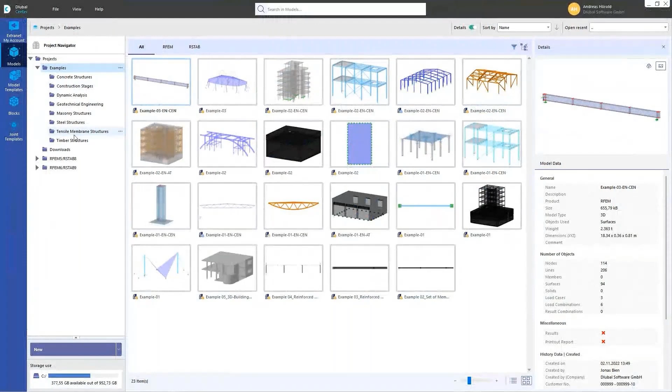info@dlubal.com. Okay, then I open RFEM, and the first question is, I add new objects to the design. Do all results have to be recalculated? The answer is no. It's not necessary to recalculate all. How to do that? I will show that on that simple example. That example, you can find it in the Dlubal Center under examples, then steel structures, and that's the example. I prepared that. I selected also the steel design.

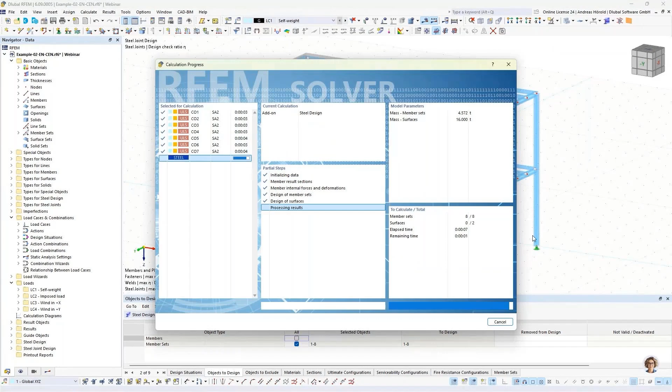Okay, so let's do a steel design. And I select only the member sets. The member sets are all columns. Let's calculate all. I have to mention that I don't edit imperfections. I don't edit buckling lengths and so on. That's why we don't do any stability design here. It's only an example. So I switch to the wireframe model. And you can see we see all the results for the member sets.

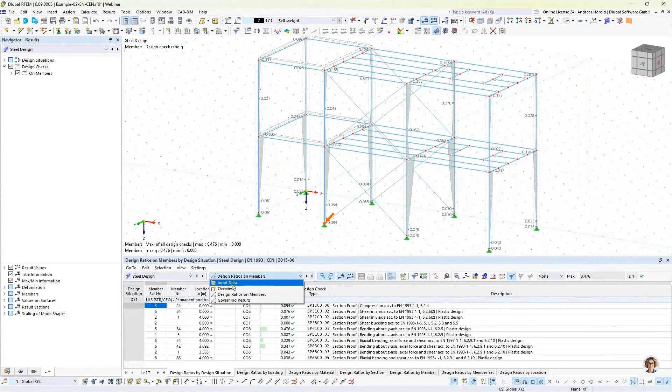So, when we want to design also the members, I select the members, then all results are deleted. So now I show you the other way. I calculate the member sets again. And if you don't want to delete the existing results, go to the navigator data, left at the bottom, and then right click to steel design and press settings. The other way is to go to the table steel design, input data, and then you can press that button.

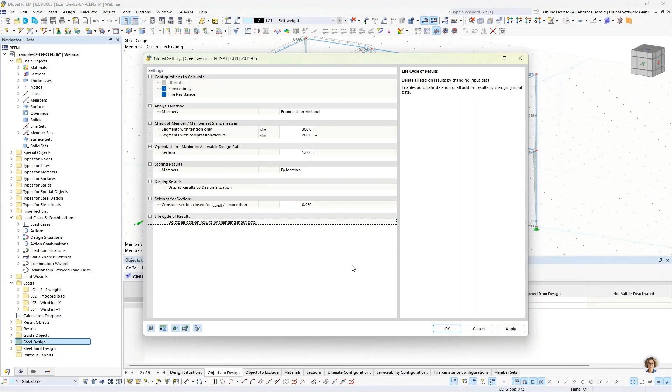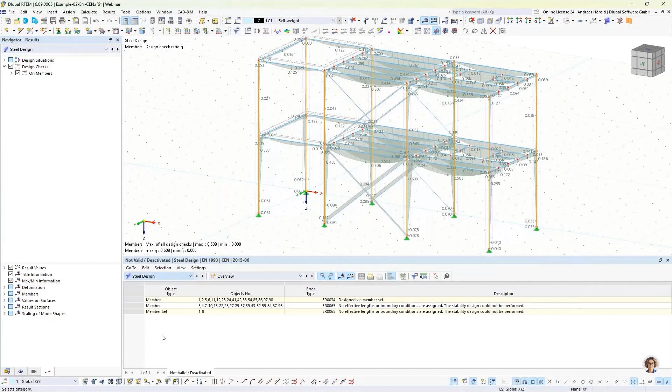That's a different way. And then you can deselect that button, delete all add-on results by changing input data. And if you uncheck that, the results aren't deleted. Okay. So now we select also the members. The results aren't deleted, and I can recalculate all. So now we have results for all. It shouldn't be necessary for that simple calculation, but if you have, for example, more complex models or more load combinations and so on, then you can do that, or you have activated the add-on steel design.

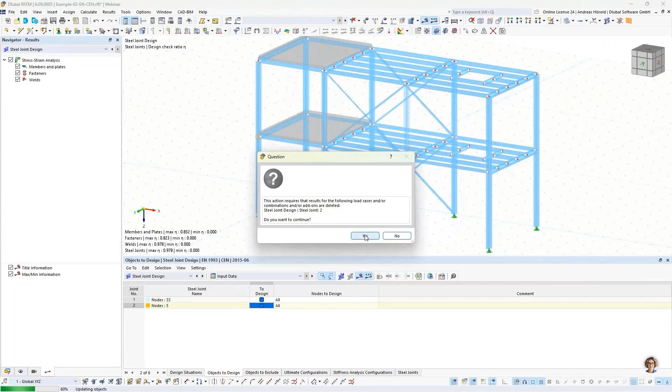In this example, only one of two nodes is designed. Yeah, only this node. I can show that. So this connection or the joint is already calculated, but not this one. And if I deselect that also, then I can press that button for designing the node 5, and the results aren't deleted. It's only an error, not calculated yet, but the results of this node, node 33, aren't deleted.

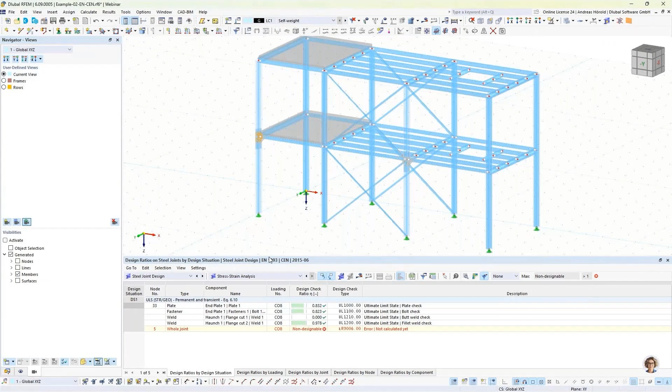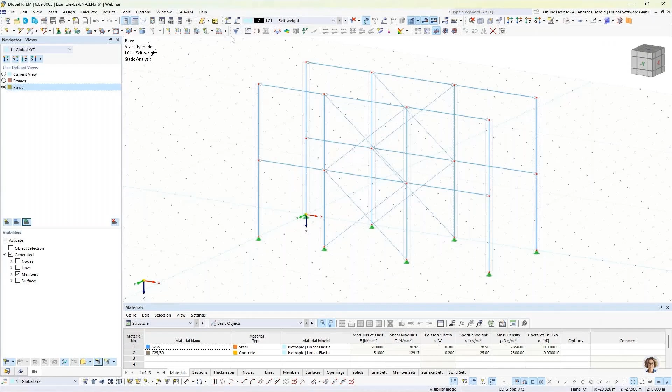Okay, then we turn to the next question. I want to edit a multi-print afterwards. How do I do that? I prepared this example. At first, I don't show the results. As I said, I prepared user-defined views for the frames and rows. And I want to print the internal forces, for example, for the rows or the frames. Let me show that. For example, we show the member internal forces for N or My.

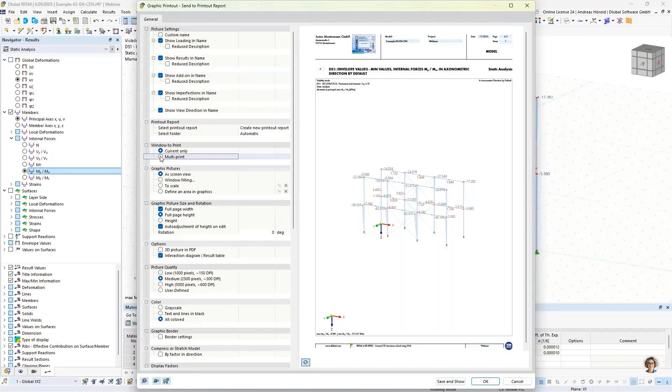And we would like to do a multi-print. So let's do that. Print graphics to printout report. Then I select multi-print and window filling. So then we have to select what we want in the multi-print. No views, no loads, but results. For the frames and the rows, the user-defined views, then members, internal forces, for example, N, VZ, and MY.

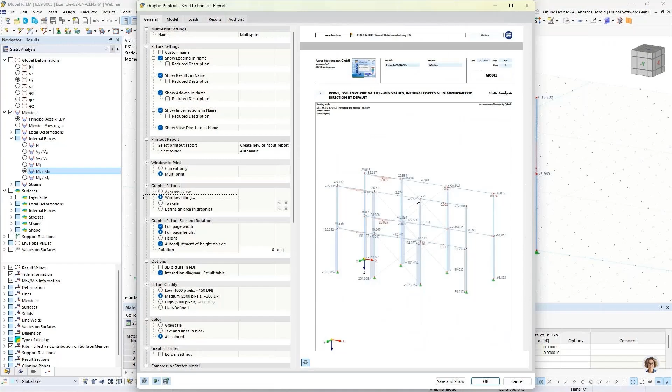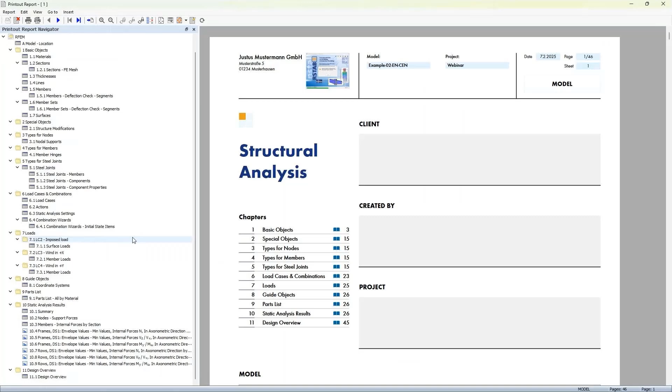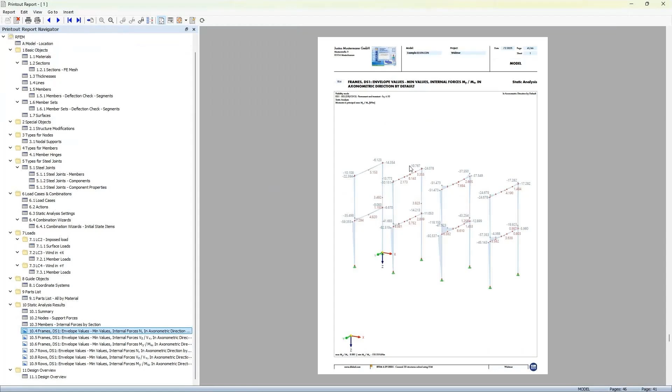So now we can see the different graphics. I can change the view, fit page. So those are the 6 graphics, and we want to edit these multi-print.

So how to do that? That button, edit multi-print. I select it.

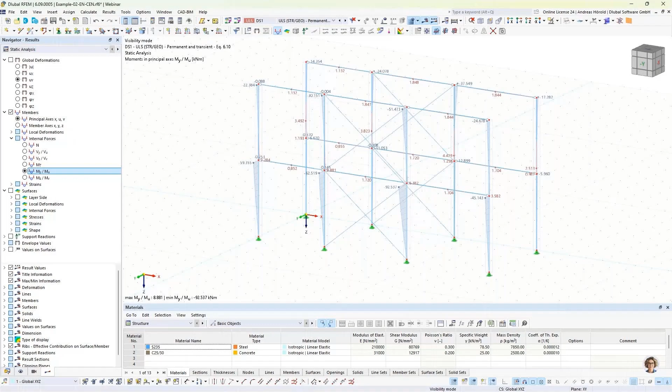So, and now we can change the settings. For example, results, we want to add the other internal forces. So now we have got 12 images.

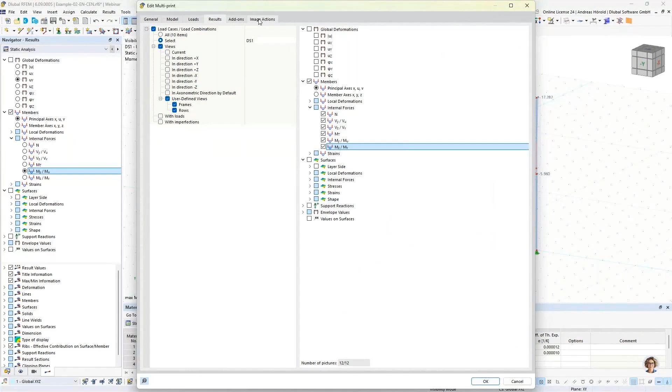So, and we can go to or turn to image actions. And we can increase the window. We can say update or no action, add for the new graphics, or what you want.

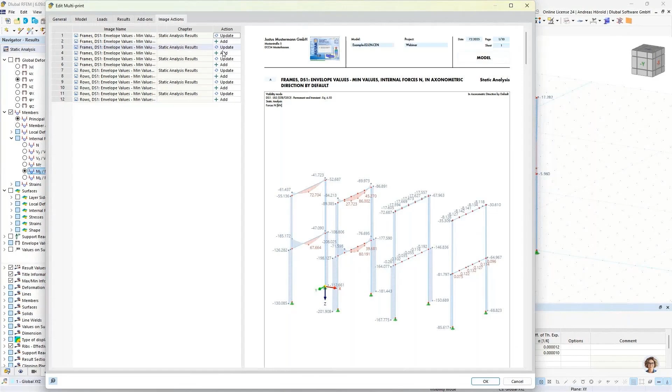You can also change the graphic, for example, the color grayscale, then all images should be in gray. Update add, we leave that. Press OK.

So, yeah, the graphics are updated now, all in gray, and we have got all the 12 graphics. Okay, that should be all to that question.

The next question is, why do I get a different section moduli in RSECTION than in SHAPE-THIN? Let's turn back to the PowerPoint.

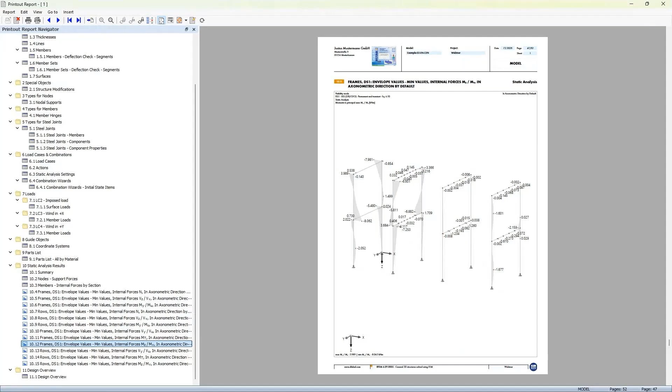And in RSECTION, there's a more complex or more detailed formula. It's more exact, and it's an improvement in RSECTION. And you will get different results.

And what is important in shape thin, with the section moduli calculated in this way, it's not possible to directly calculate the maximum and minimum normal stress from the bending moments for asymmetric cross sections. For symmetric cross sections, you will get the same results in both.

And in RSECTION, the section moduli are determined in such a way that they allow for the direct calculation of the extreme normal stresses from the bending moments. And that's the difference. That's a short overview.

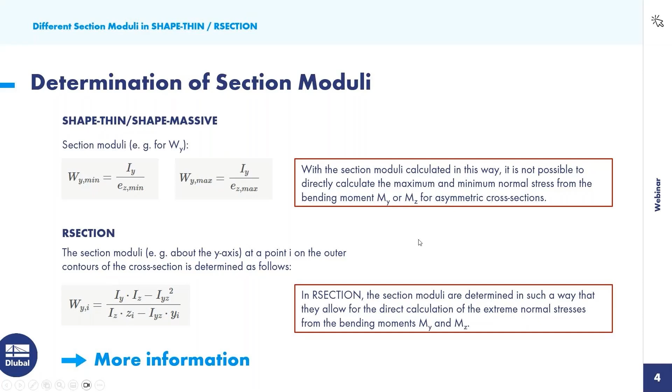We start with the moments of inertia. That's the same: 515.9, and Iz is 94.46 for both. But the section moduli is different.

So, for example, WY max 75, and where is it? Here, 37.18. The section moduli are different, and the reason is, as I described it in the PowerPoint.

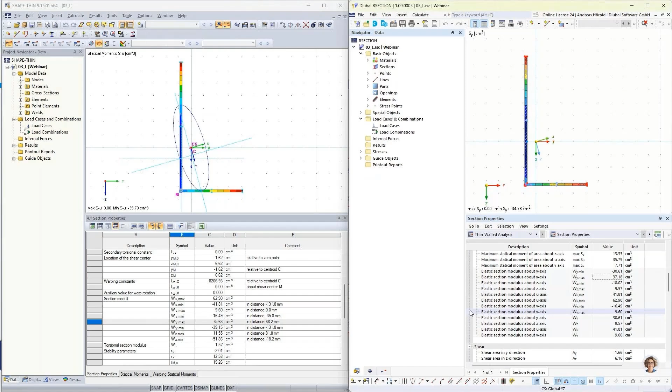So the next question is, can the longitudinal reinforcement of members be determined automatically? So I've created a model for you. This is a reinforced concrete building with members building a frame, having 3 frames in a row and 2 stories.

And load transfer surfaces, which will hand over the imposed load and the snow loads and the wind loads on our building. So we already have static analysis results.

And what we now want to show is how you can define reinforcements and let them be calculated automatically for you. So we show it in two member representatives. So number 2 are the outside members and representative number 3 are the inside members.

And if you double click on the member representative, you can assign longitudinal reinforcement for all the members behind it. So usually you can define the number of bars and the diameter, but the program can also automatically determine this for you.

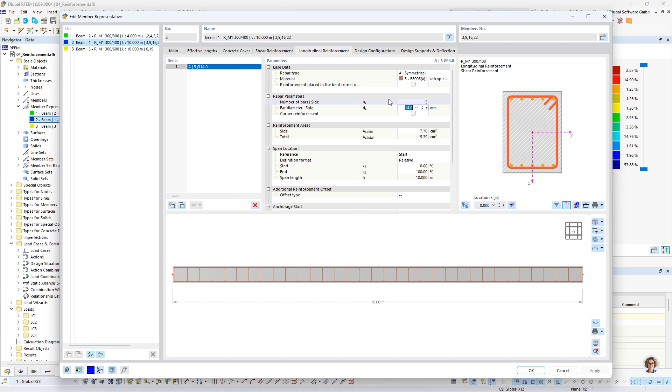So not both simultaneously, but either this number of bars or the diameters. For the representative number 2, we want to automatically design the diameter. So we want to put inside 5 bars in the range of 10 up to 20 millimeters of size. So whenever it reaches the maximum, it stops, of course, from inputting more bars or thicker diameter.

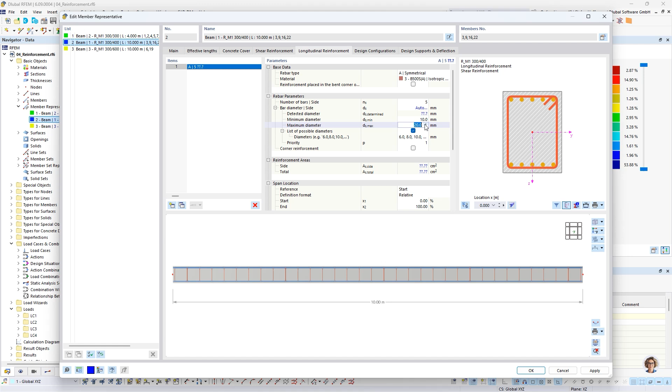So you should see in the results that then the design is not fulfilled. So you can later on adjust, of course, these boundaries in order to let the program fully determine the amount of bars. So you see what you can enter in here.

And for the representative number 3, we want to adjust the numbers. So we hit auto, and then we can also determine with a diameter of 20 millimeters in our example a maximum amount. I know that 4 are not sufficient, so we will try to put in 4 and see what the program will offer us.

We go into the concrete design where we now only want to get results of both representatives. So now we hit calculate. Due to the fact that we already have static analysis results, it quickly jumps into the concrete design, now doing the workflow for you. It's calculating the amount and the diameters depending on what ranges we input.

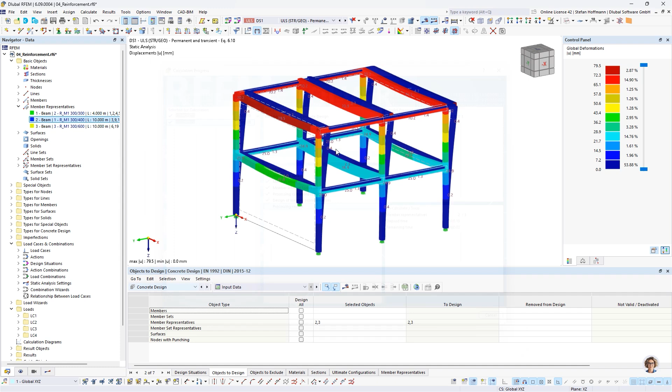Once we receive results, we can see that one check is not fulfilled. This may be an information that it's not sufficient reinforcement put inside. We can quickly determine, for example, the bottom reinforcement for our representatives is like 17 in the middle. What the program provided us is, if you only check for bottom, 12.57 in the middle. So you may be wondering why it's not enough.

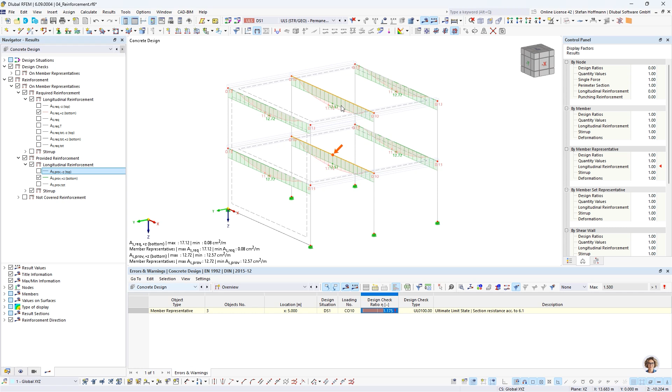You can also check this in the not covered reinforcement if you want to see the gap. We can now see that there is only a lack here. If you remember, going into representative number 3, I told you we want to achieve this result by putting a maximum of 4 diameter 20 inside, which will give us 12.57. So this is, of course, not enough.

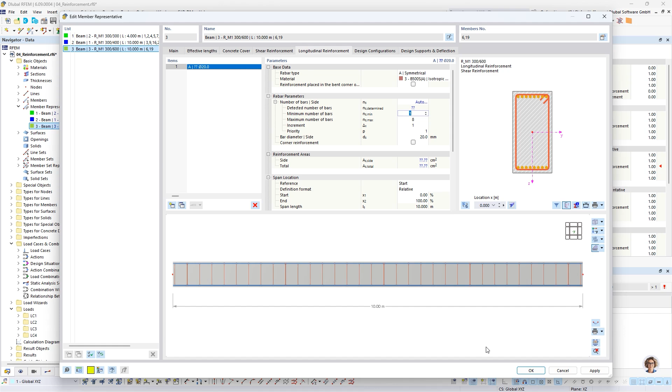So in order to let the program run at full capacity, we now allow a maximum of 8 bars in this member representative. There is no boundary for the program that it has to stop. It can now determine and fulfill the design process.

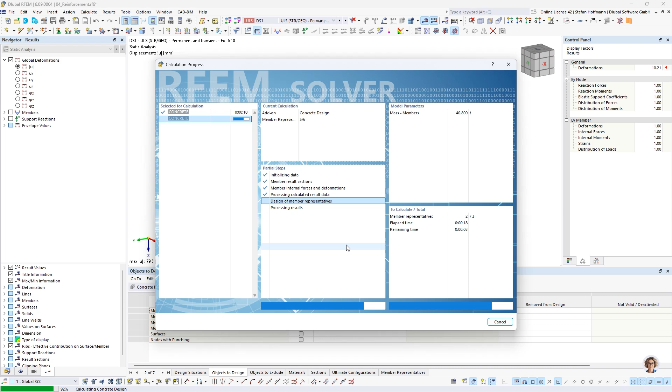Whenever you get the results, we see that in the table there is no limit anymore. There is of course a maximum, but this is only due to construction reasons. If you now compare once again, it does not change. We need 1712, and we provide now 1885 in this area. This means there is no not-covered reinforcement for our model. This shows how you can quickly and automatically let the program determine the required reinforcement for your members.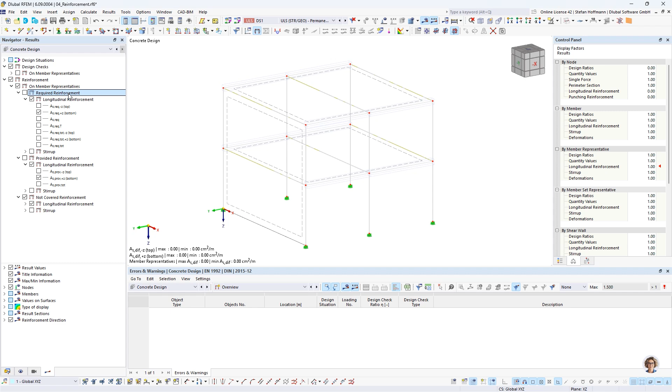We will go to the next model, our block foundation. So the question is, can I design a block foundation in RFEM 6? And yes, it's possible.

Quickly about the model, we have just a single column which is fixed at the bottom with some loads on it. In order to define a block foundation, you have to assign it in a nodal support. You simply hit the check that it's a foundation, and then there's a next topic where you can choose what foundation you would like to choose.

It's object oriented, as RFEM 6 offers you to define one object of a block foundation for multiple columns. You just simply need to assign this object, and you do not need to type in multiple inputs just for multiple similar objects.

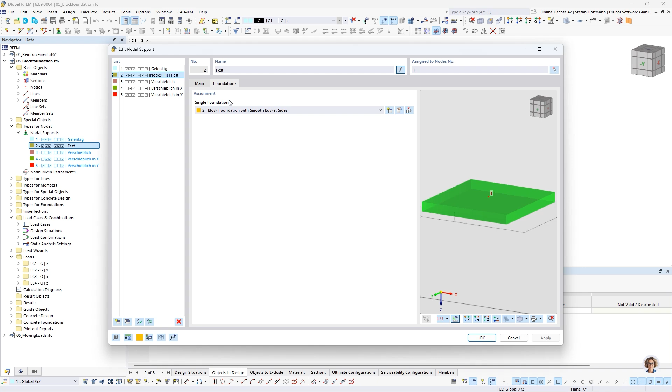Once you define this, it is also shown graphically, and if you double click on it, you directly jump into the single foundation. You can see that there are several types, and we want to take care of the block foundation with smooth bucket sides.

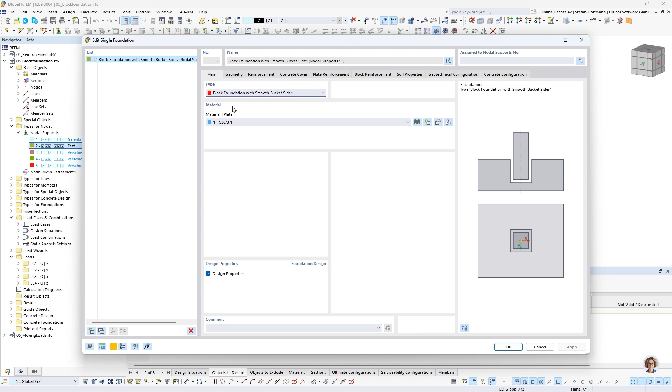First you need to start with a material of the plate, what you define, and then you can step into the geometry, where you can also define it by checking the sketch, or you simply switch into the full view, where you can also use the view cube in order to rotate your model to see if it fits for your column and your purpose.

Then you step into the next reinforcement definition, where you choose the material and the types. Then you switch into the cover, so you can define different durabilities for different places.

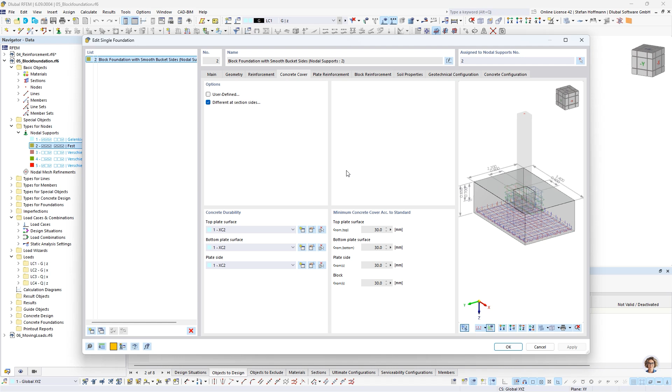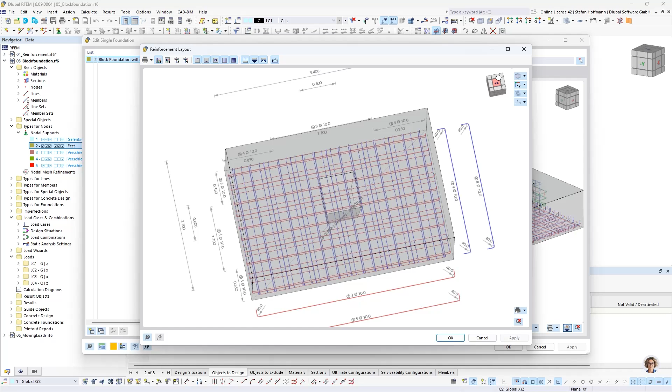The next definition would be the plate reinforcement, so the bottom and top ones, where you can enter the data you would like to. You can also directly see the representation of the concrete reinforcement in the graphics. You can also jump with this shortcut into the reinforcement layout, where you also have the view cube, and you are able to switch on and off some certain reinforcement types and also to print it into the protocol.

The next one is the block reinforcement. So for the bucket sides, you can also define stirrups, which is most likely necessary depending on whether you have a lot of horizontal loads.

The next one would be soil properties. So we also would like to do a geotechnical analysis in our model. You can define user-defined soil parameters, or most likely with the geotechnical add-on, also a soil massif, in order to gain all the soil properties we need.

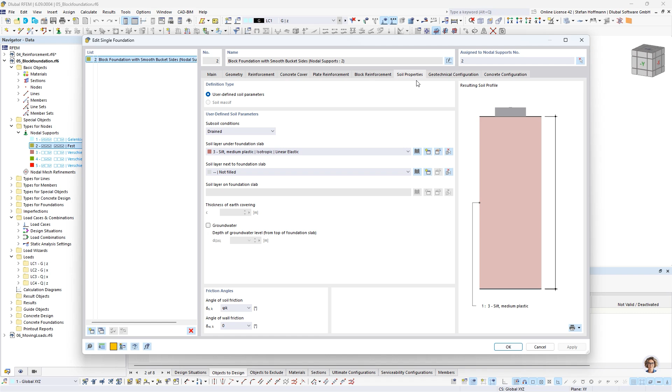The last two steps would be to check or assign geotechnical design configurations, where you can choose what you would like to inspect — either it's necessary to do all, or you can just choose to do some designs only. Last but not least, the concrete configuration, where you are able to adjust the current set parameters.

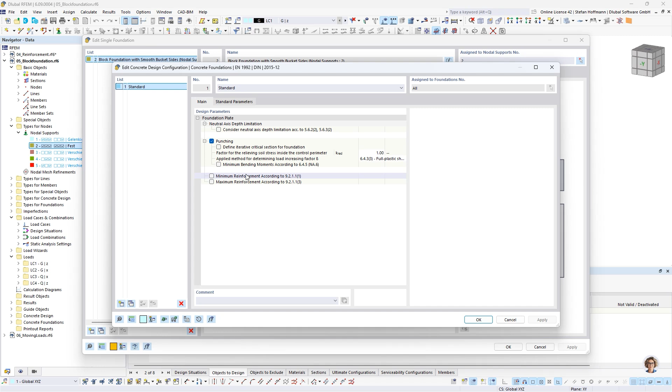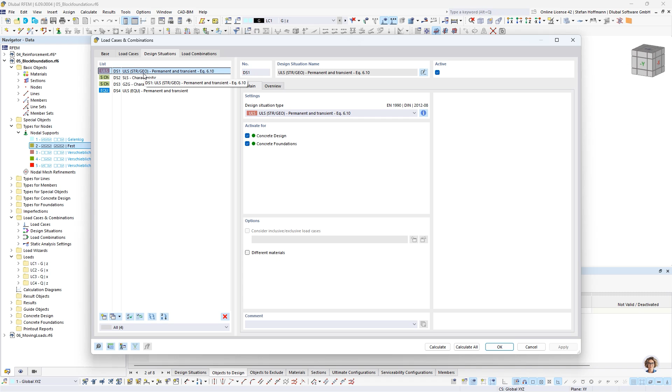So we defined all the properties. We just step quickly once again into the loads. So we defined multiple design situations: the normal ultimate limit design with structural and geo collapse, the other SLS situations, and also a ULS equilibrium permanent and transient design situation, what we will only take care about in our concrete foundations.

So jumping into the concrete foundations, you see that we have assigned the design situation types, and if we hit calculate, it will run first of all the static analysis, because we do not have results yet in this file. Does not take long. You can see 6 cores are used on my computer, 3 seconds. And then we will directly jump into the results.

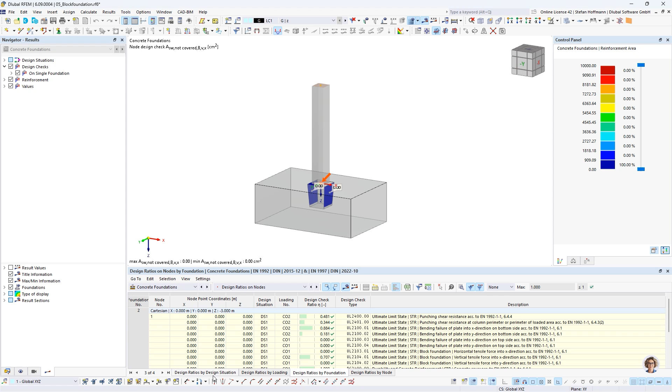So you have, as you are maybe used to, also table results, where you can switch between representation of different information. And you can also use, of course, the navigator in order to check for all the required or provided reinforcement, which is split as shown in the first part, also for the plate, bottom and top, and also for the block reinforcement, what might be required in order to fulfill the force distribution into the foundation.

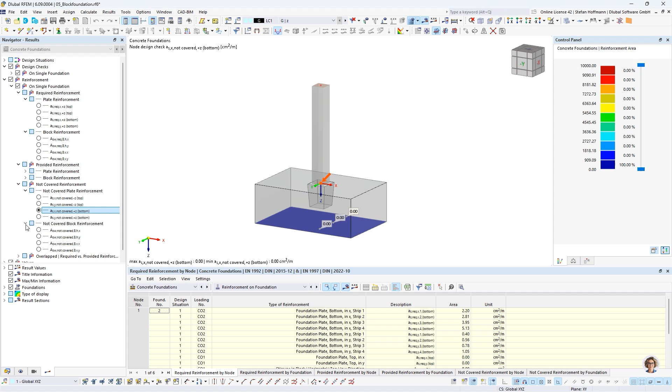And of course, you can once again also see the not covered reinforcement by checking the values. So as you can see, we are lacking some reinforcement in the bucket sides.

So we are coming to my last example. And the question is, how can I create moving loads in RFEM 6? In this example, I use the model from our knowledge base article 1908. So we have a load what we would like to define, 2 single loads, 1.5 meter spacing, vertically and horizontally in both directions. And we have then an axle load of 240 kilonewton per square meter with a size what is given in here. So it should go across the bridge.

In order to have the loadings to be defined, we first of all need to have a line, which then needs to be a line set. So the line set will be used in order to define the load direction. And then it's no extra add-on what you need. It's already included into the main program.

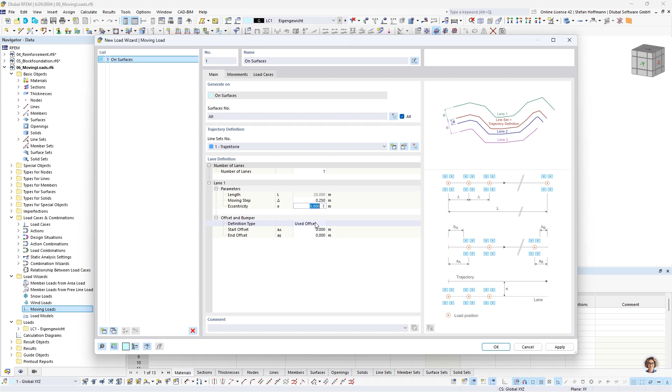So it's a load wizard where you define a new load wizard with the moving loads. You first of all go from top to bottom, left to right, and you have to define what surfaces you would like to use. In our example, we can hit all because only our street is used with surfaces. And since we only have one line set, it's already assigned over here. And we want to have the moving step a quarter meter. And the rest we can use as it is given, only one lane.

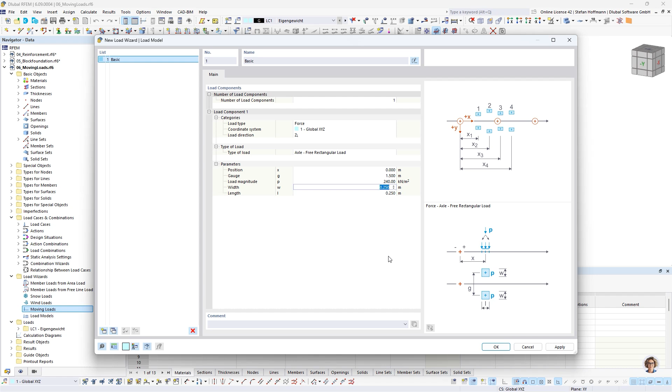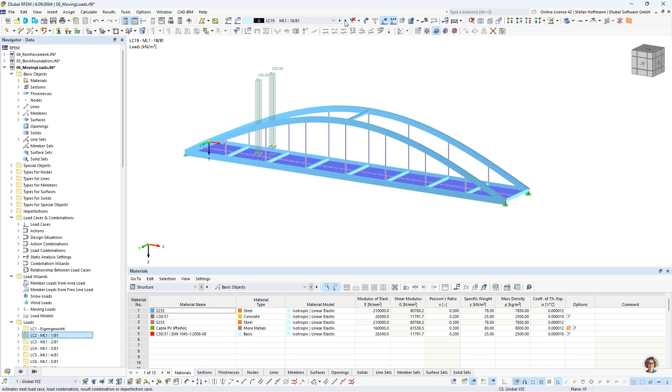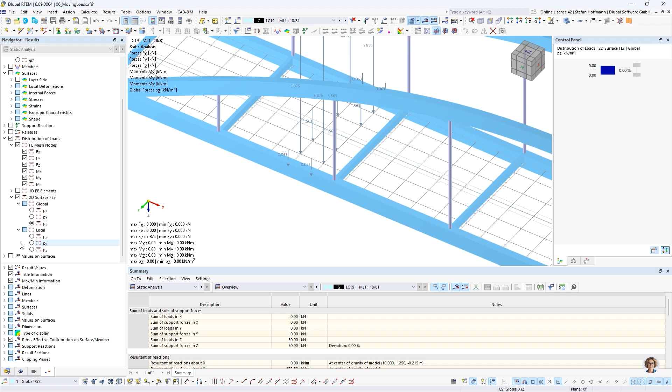So you can see that loads will be created, 81 load steps. And you can then, of course, see how the load is moving on over your bridge by checking these steps. You can also run a calculation if you would like to do so for one certain load case, or you use it in a result combination that you can get knowledge about the overview of your results. And also a good step you could use is the distribution of loads, where you can check how the loads will be transferred, most likely on PZ values, or sometimes also as split nodal loads, depending on how you use the definition.